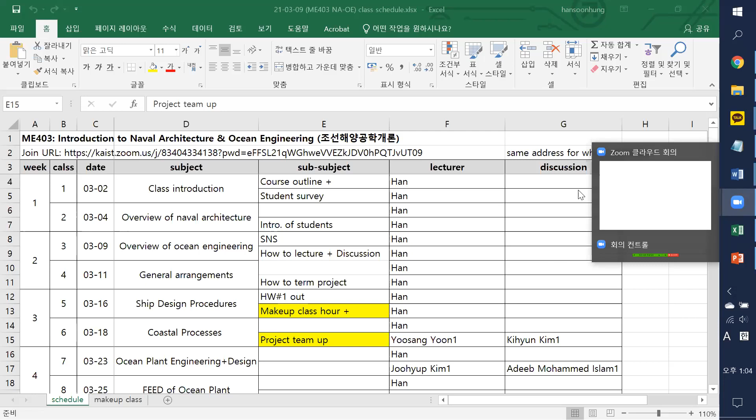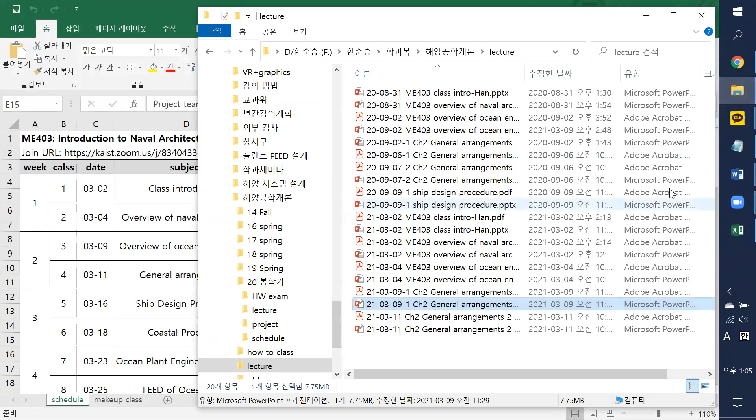All right, so let's go on to the lecture note, if you do not have any further questions. All right, so this is the material we did last time. Something is wrong with my notebook. It's not responding to me. What happens? Okay, let's try again. All right, this time it's working.

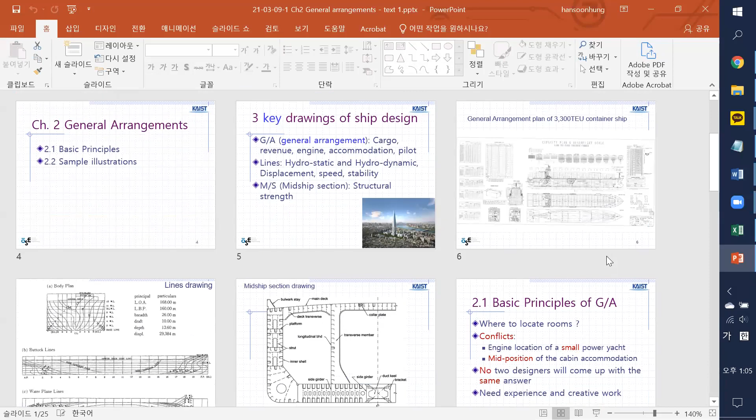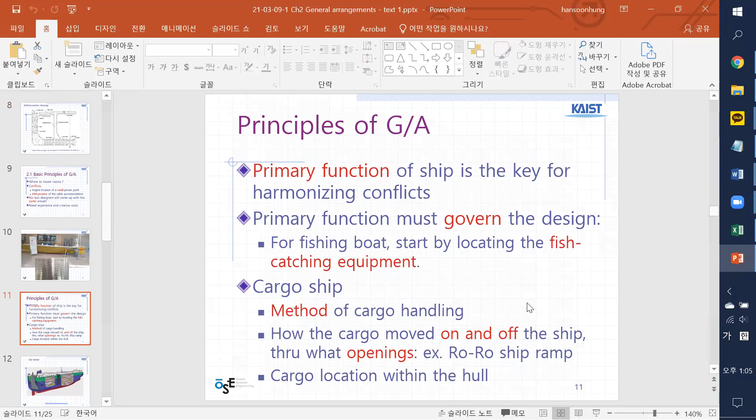So last time I stopped around where? This section drawing? This one? Is it right? I stopped here, right? No? Can somebody else remember? Oh, yeah, I probably stopped here. Okay.

So this is a midship section drawing that is important for structural safety, whether the ship is not breaking into two parts on the sea because of the high wave, right? And the shape is very similar in a gross way. It looks like a big fish, like a shark or something like a big fish, with bone structure.

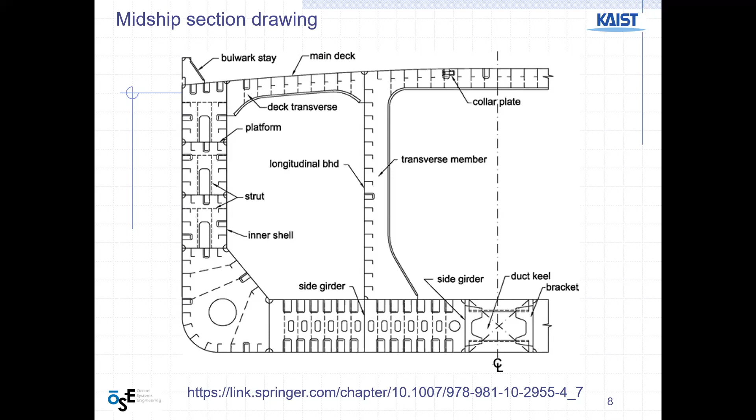Okay, so the basic principle of general arrangement is where to locate things, and then there is a conflict over which one goes where. Something like the engine room location of a small power yacht, because usually the center part of the ship is more stable than the two end parts. As you remember, the ship is pitching and rolling. We will see the names of the motions later. Pitching is this way, the front going up and down, and rolling is sideways motion.

And at the center, this is the center of the motion. The magnitude and acceleration are smaller than at the far end, so people want to stay near the center of gravity of the ship for smaller motion and acceleration. So for a small luxury power yacht, the rich men want to stay calm when the ocean is rough.

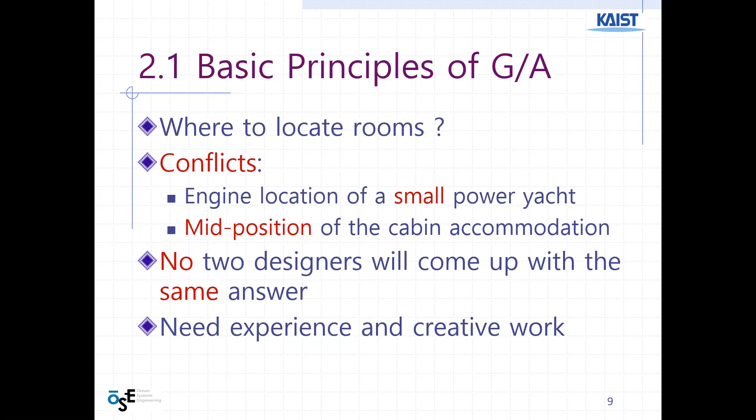So it is a general principle that every design has different solutions. That means there is no single correct solution, right? That's why we need experience and creative work for any design, including general arrangement.

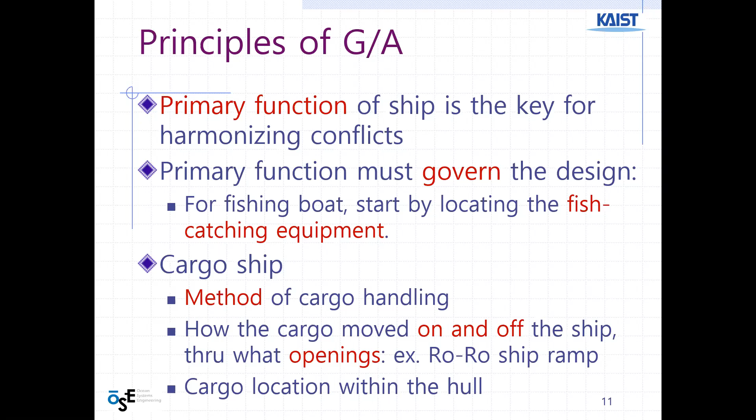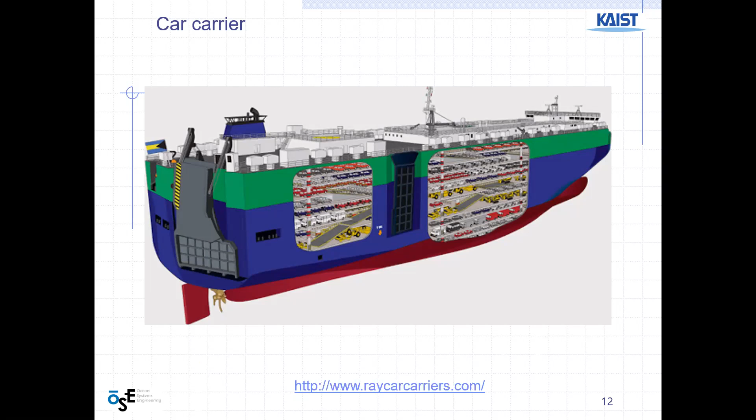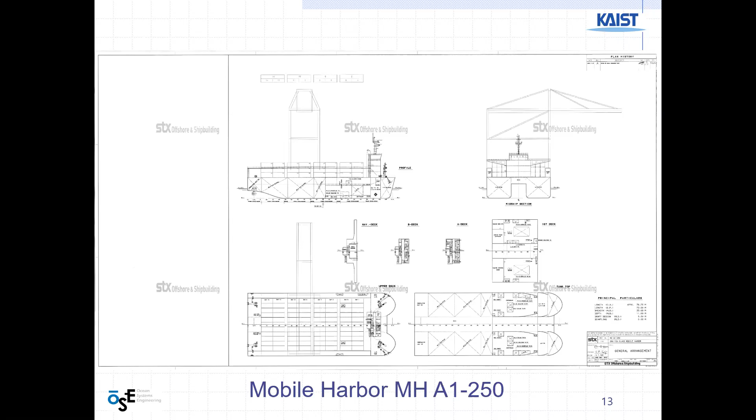And on the right-hand side, see that there is a small box. Here you can see there are some people, the name of the drawing, date of the drawing, and also who drew this drawing, who checked this drawing, and who approved this drawing. There are people's names and signatures there. So once it is released, those people are in charge, or if something is wrong, then he should be in charge of this engineering result. So this is an important general arrangement drawing for the shipbuilding company.

And the principle again, inside out, not outside in. So interior arrangement is important for the general arrangement people. The inboard profile is an interior arrangement of rooms before exterior appearance. But sometimes it is not this way. Sometimes exterior is more important than inside, depending on the ship.

Say a luxury yacht, or something like a high-speed Navy ship. In that kind of situation, exterior is more important than inside. But it depends. So there is also a conflict between them. Oh, here it says, but in a yacht or passenger ships, reverse the procedure. So the exterior can be more important than inside.

And ship or components in service. Say, what happens in bad weather, rough sea, rain falling, and rolling and pitching? I already told you that rolling is sideways motion, rotational motion. Pitching is front and back motion. It is another kind of rotational motion, but the rotational axis is different. And deep submergence. So what can happen in service?

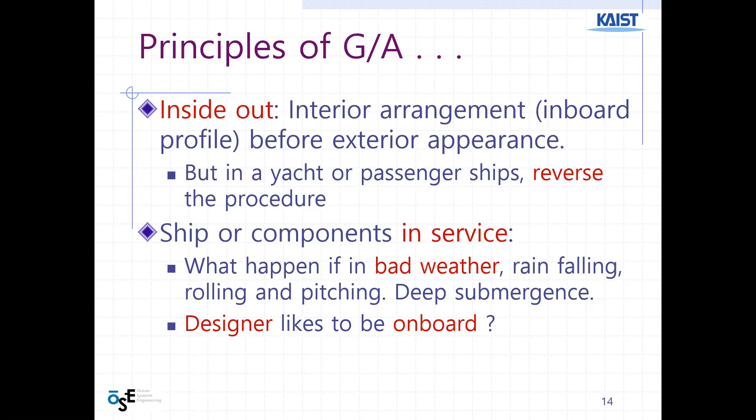Okay. So let's see, there is one video. Let's see the arrangement.

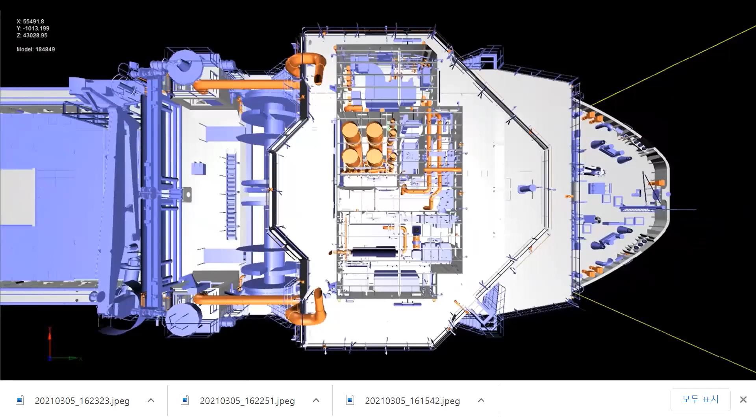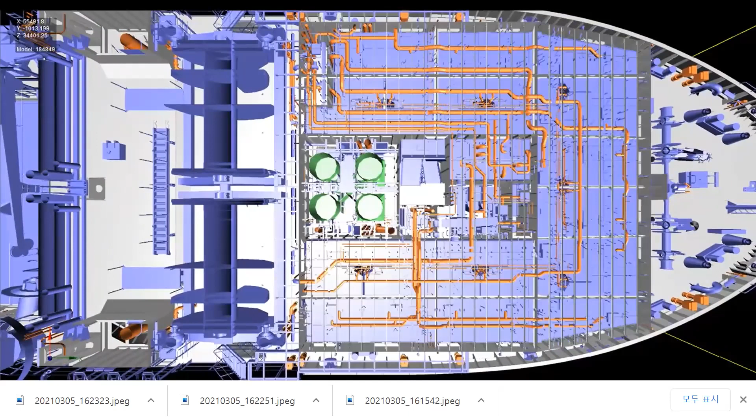It looks like a computer-aided design for a three-dimensional general arrangement, so it is easy to manipulate. And this one is going down toward the engine room, so the piping is very complicated. And the four circular parts are a funnel coming from the engine.

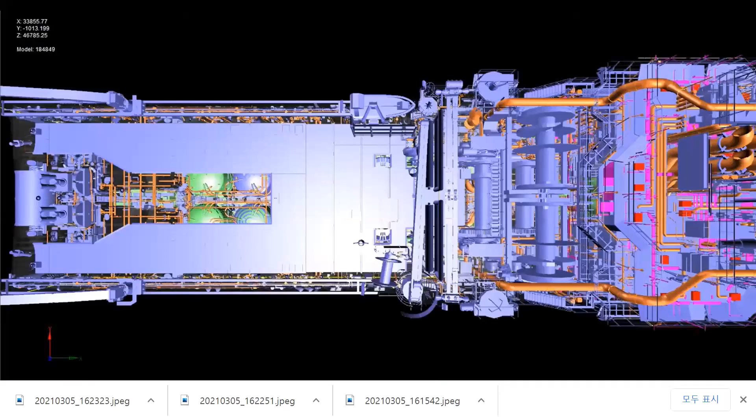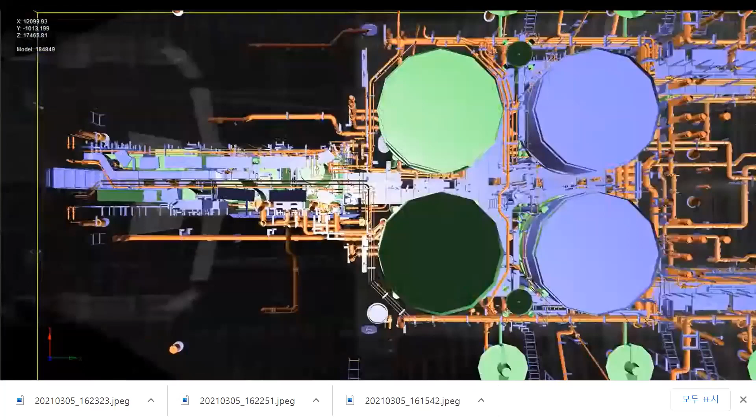They need exhaust gas coming up again. Right. This is the shape from the top and bottom, moving toward the aft part, the engine room. So this is a three-dimensional drawing, but in the old-fashioned way, we need to represent this model in 2D drawings.

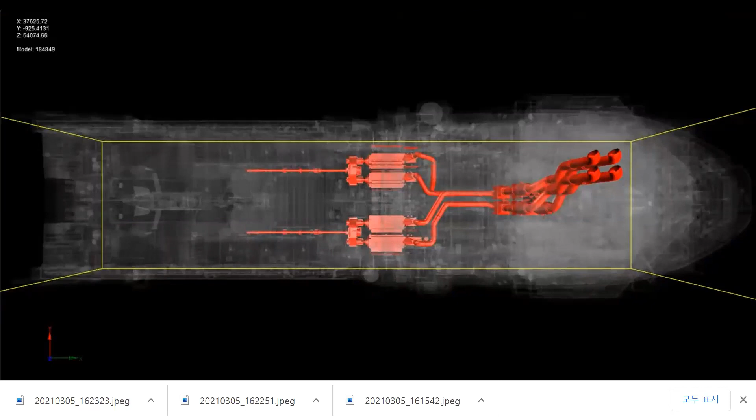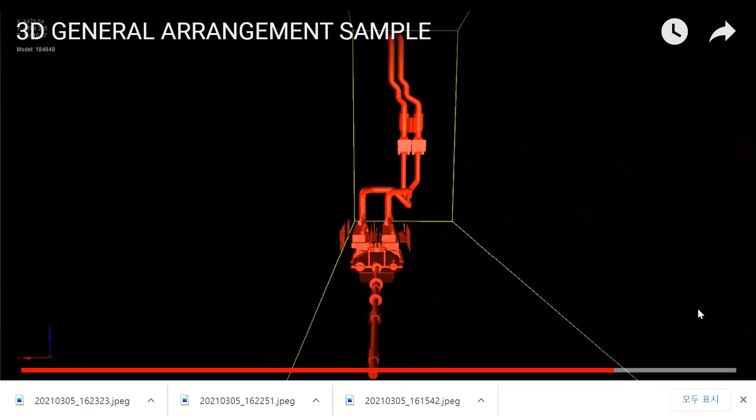So nowadays, more and more people use three-dimensional CAD models instead of 2D paper drawings. Okay, this is the engine with the exhaust gas pipe. Two engines, actually four diesel engines, but two are combined together each. And the shaft line goes toward the propeller.

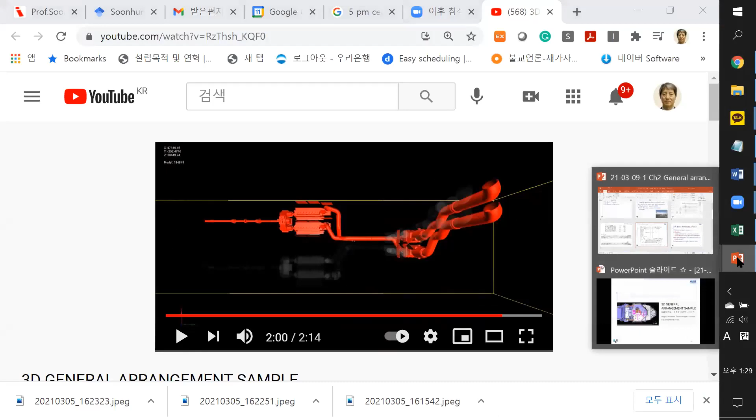That's enough. Question? Okay, then we can move on to the next slide.

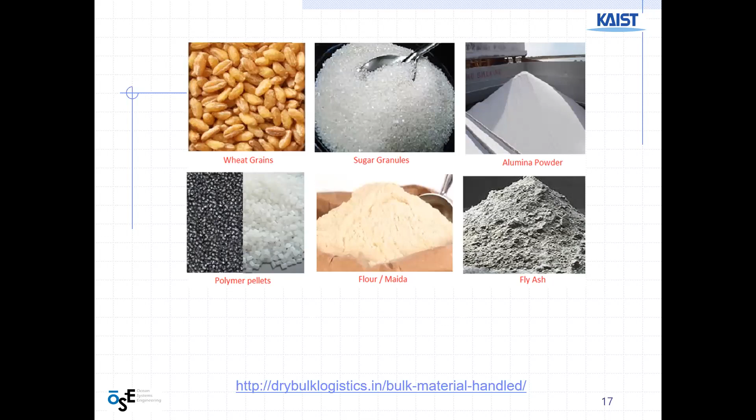And then conflicting items apart. There is a conflict, like a noisy item near a cabin. Something like a library and a disco bar should be far away, right? So there is a conflict based on environmental noise. And also major structural items in the layout. A cylindrical pillar at the center of the theater cannot be a good solution. The theater should be open enough so that the sea view is good enough, right?

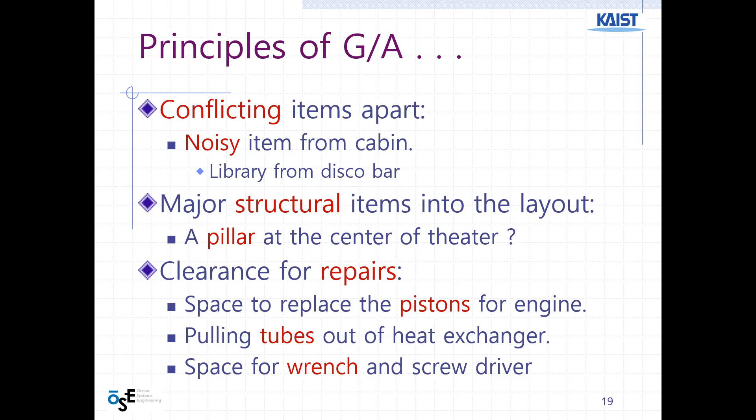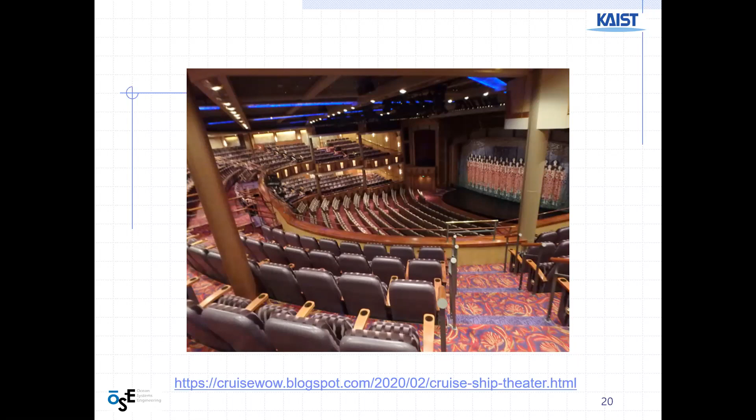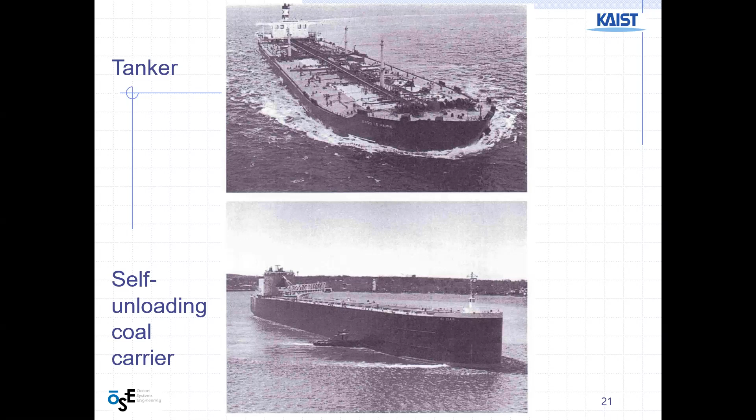A tanker is an oil tanker. They carry oil, so they don't need large openings like bulk cargo ships, but they need pipes and pumps, which are important for loading and unloading crude oil. At the bottom is a very interesting bulk cargo carrier, a self-unloading coal carrier. It was famous on the Great Lakes in the United States.